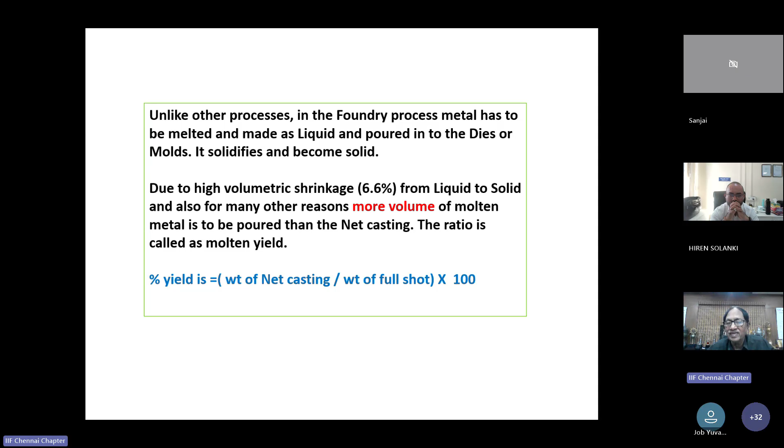Percentage yield is calculated by a formula: weight of the net casting divided by the weight of the full shot, into 100, expressed as a percentage. Now let me show how the various processes give yield.

In sand casting, the yield is very low, hardly 20 to 30%. We have to pour much more metal. In gravity casting, 40 to 55%. Suppose you want to make a casting of 1 kg, you have to pour about 2 kgs of metal. Tilting gravity casting gives 55 to 60% yield. High pressure gives 55 to 65%. Low pressure gives 90 to 95% - the best process. If you want to make a casting of 1 kilo, it is sufficient to pour about 1 to 1.05 kg. Such a very good process.

Counter pressure die casting is also excellent. Used for thin walls and also big castings, 95 to 98%. Excellent yield, but it requires a lot of investment. Squeeze casting is also 80 to 85%. Used mainly for very thick castings where you don't want blowholes or shrinkages.

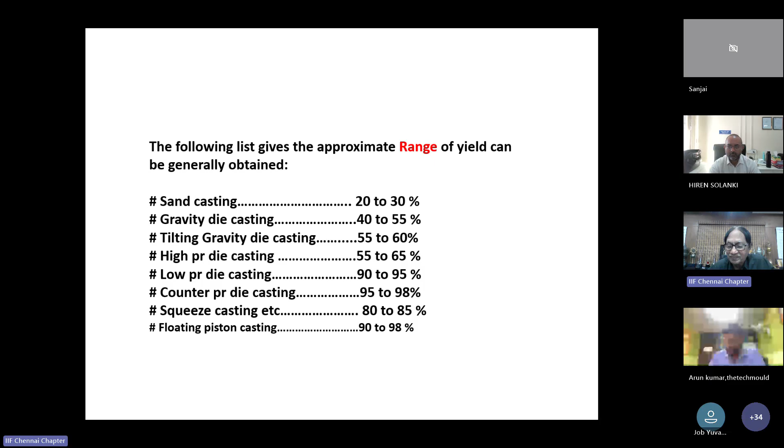All are squeezed out. Floating piston casting is about 90 to 98%. Number one, this is being followed by Hyundai foundries. An excellent process, a variation of low pressure die casting. So, of all the processes, the best one is low pressure die casting.

Some general guidance for reducing the riser and runner. A casting has got two portions. One is the riser, one is the casting. The riser cannot be sold, the riser is a waste, but it is required for the process. Only the casting portion will people buy. And there are some general rules so that the risers can be minimized. Pouring from the top of the cavity is the most economical way. The riser size will be minimum.

Side gating is also useful for very tall castings. Bottom gating is the most uneconomical way because of the bottom runner and the top risers. You have to pour, and only cold metal reaches the riser. Never go for bottom gating unless you are warranted to go for it. Make the riser cavity and casting cavity as separate blocks in the die. Supposing you want to modify the riser, that riser cavity alone can be made separate.

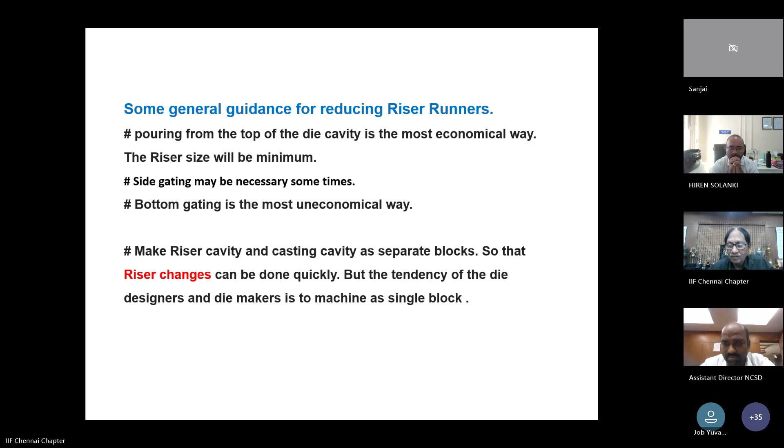But the tendency of die designers and die makers is to machine the die as a whole. That is, the riser cavity, the runner cavity and casting cavity all in one block. It will be very, very troublesome for any changes. Professor Dr. Campbell, the man from the UK, has done a book on casting. He said, in aluminum casting, no riser is required when the section thickness is 6 mm and below. Do not give more risers. More risers, more problems, more fettling. The above may be borne in mind when you make a die design.

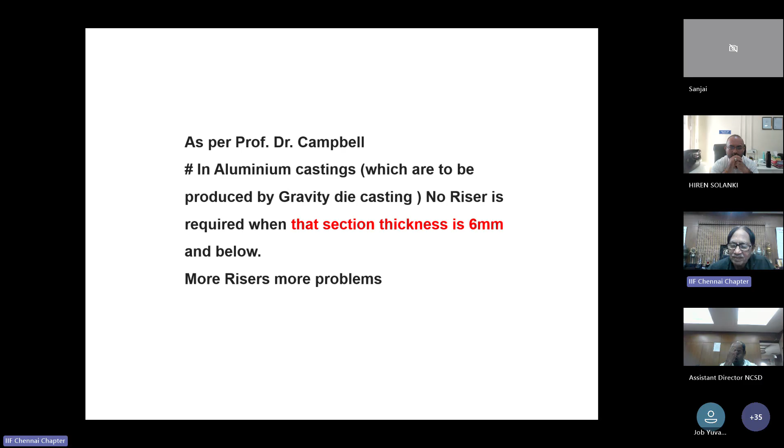Selection of the process for any casting. If the volume and the weight is justifiable, try to go for low pressure die casting where the yield is 90%. It is very economical. Although the initial investment is high and the die design is difficult and complex, yield will be very high. Fettling also will be very easy. Or go for tilting gravity die casting for thinner castings, where the filling will be easier. The riser and the runner are one and the same. You can use the riser itself as the runner.

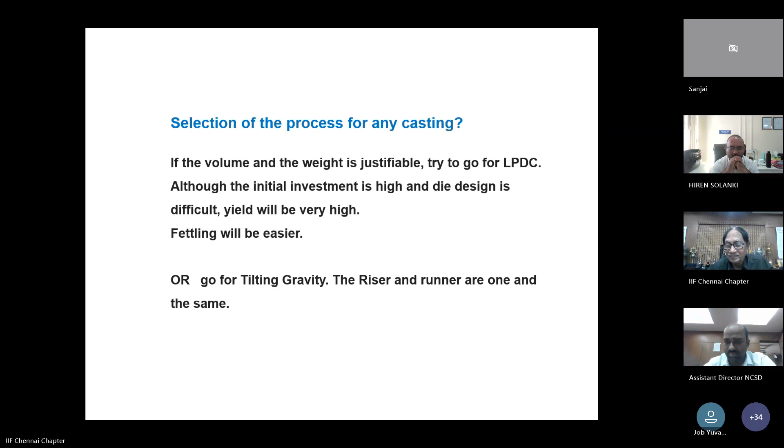The backside of the riser cavity should be made hollow, so that it will be thinner and not get cold very quickly. The die coat thickness on the riser cavity should be at least 3 to 4 mm for retaining the heat. The above will reduce the riser volume.

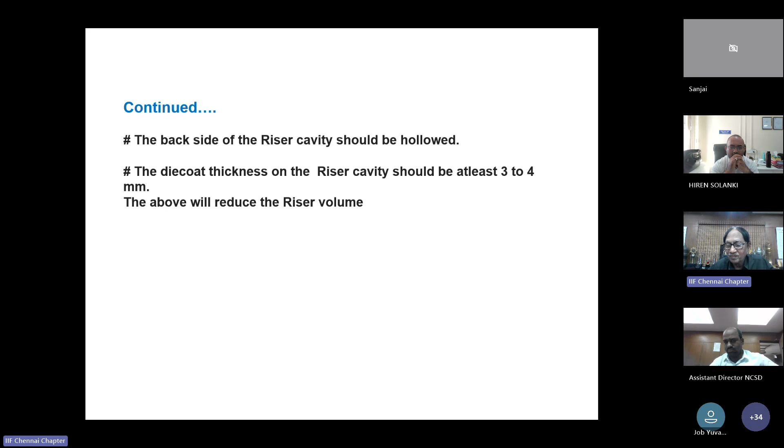In this presentation, I would like to present some real life case studies from the shop floor. These dies I'm going to show had already been made and used for production, but with a very low yield. A lot of effort had been put in to improve them. Some of the dies had been scrapped, and then we made a new die. I hope the case studies will be interesting to you.

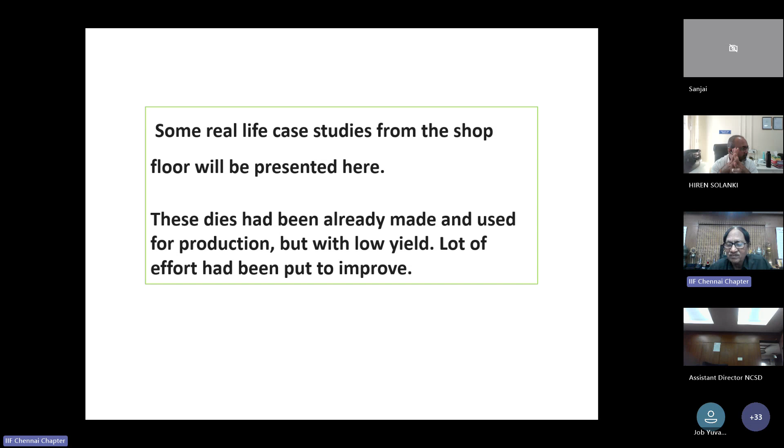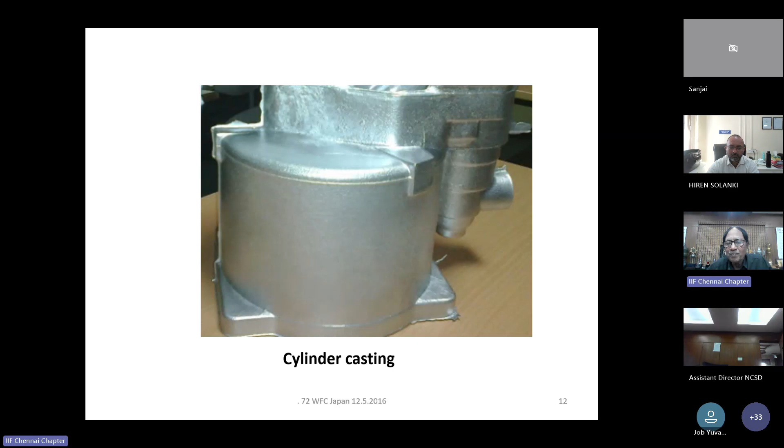This is one casting, a cylinder casting. It weighs about 3.6 kilograms as a fettled casting. Casting information: it is a cylinder. Alloy is LM4, fettled weight is 3.6 kg, shot weight is 7.5 kilograms. The process is static gravity die casting. Die material is En 8 steel and cast iron, but the quality level is very, very critical. The air pressure test is at 12 bar. Finish requirements are also very high. Very critical casting.

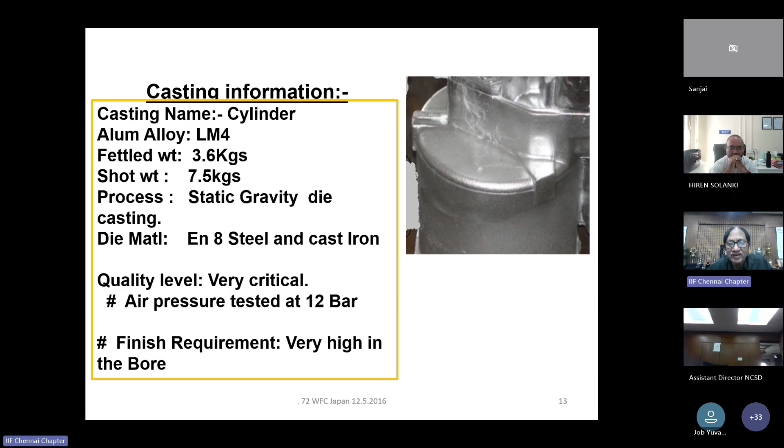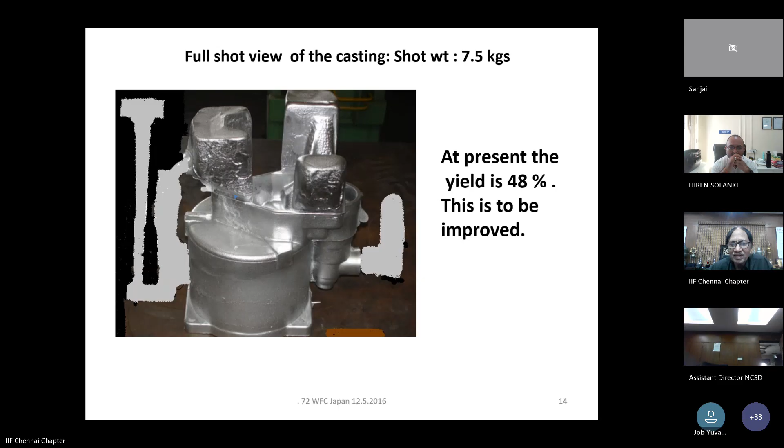See, the fettled weight is 3.6, but shot weight is 7.5 kg, which is very high. At present, the yield is only 48%. This is to be improved as per the management's instructions. This is a running die. These are the various parts of it. There are 3 top risers: 1, 2, 3. This is the side bulb riser to feed this part.

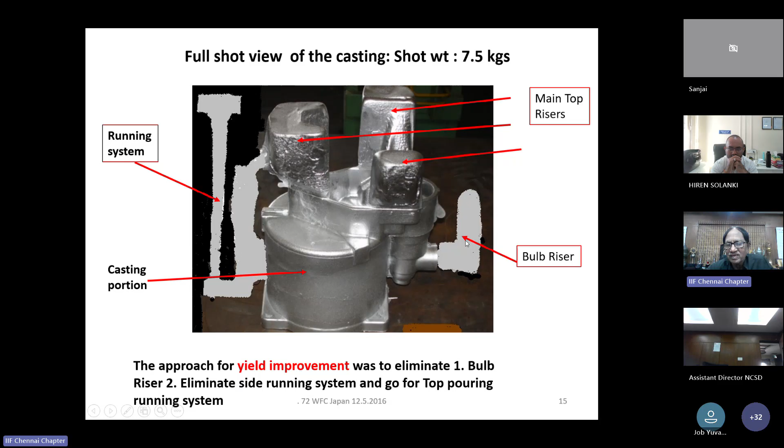This is the casting portion, and this is a side gating. Metal comes over here, descends here and enters in this one. Once it's filled up to here, it also fills the top risers. This is the full shot of the casting. All these are necessary to make a casting. But how to make it better? How to reduce the metal?

So the first thing is we wanted to eliminate these bulb risers. So whenever you do any changes to the casting, please have the machined sample along with you. We did that one and we found that the material can be reduced in this 36 boss, and we found in this one M24 tapping is done. So the material can be removed, the material can be reduced, this feeder can be eliminated.

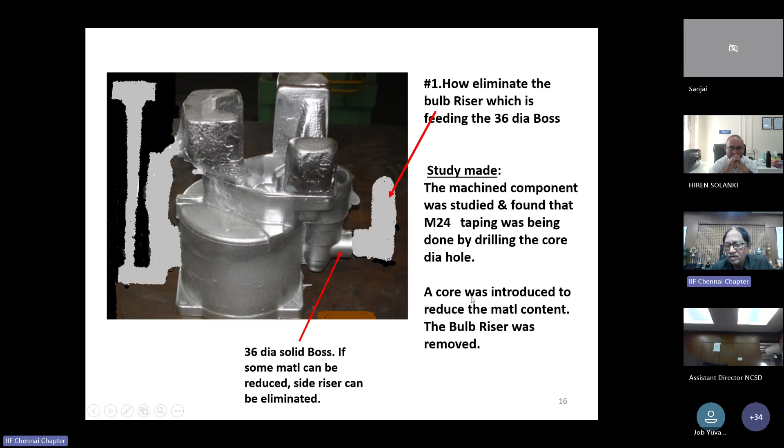See, one of the fundamental approaches for shrinkage is, number one, explore the possibility of reducing the wall thickness or the casting material if the design permits. This is the first step to be followed for solving any shrinkage problems. Luckily, we have this 36 dia being tapped to M24. So a core was introduced in the die newly, a 16 dia core. So nearly so much length and material has been removed in this one.

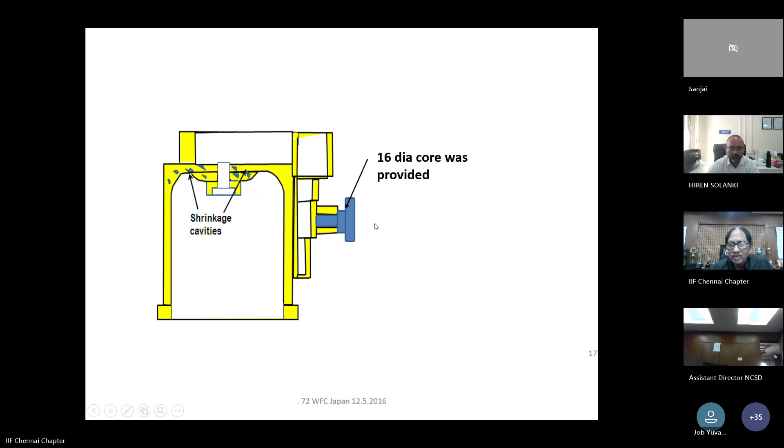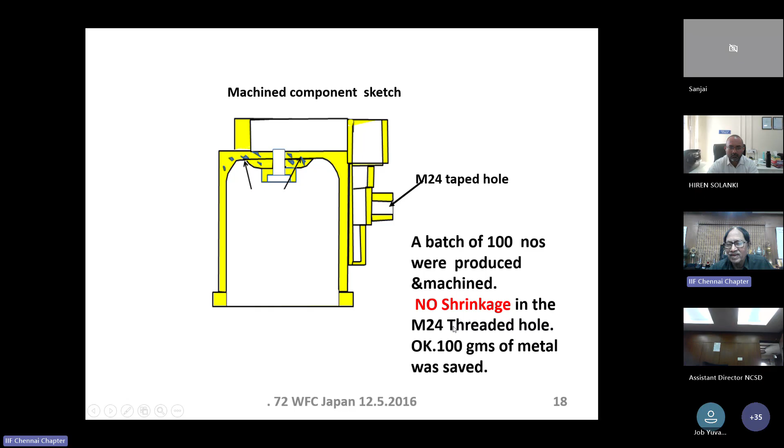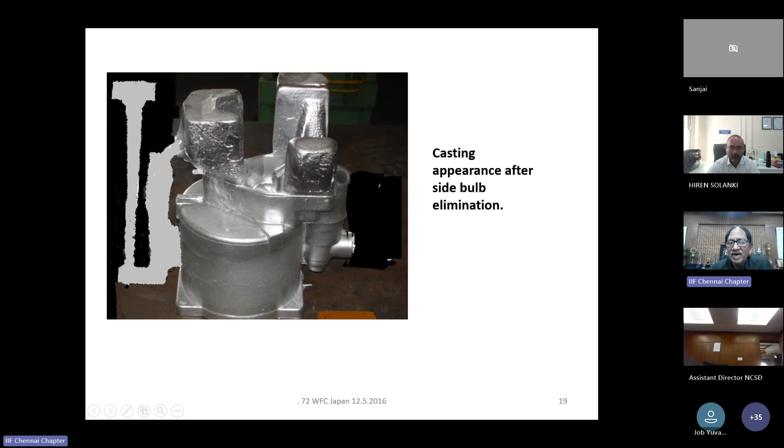Second, removal of the side gating, providing a top gating with a controlled flow. This is a very difficult task. How are you going to remove a metal which is running through this one and coming through? You are touching the very critical portion of this one. Then how to fill the casting? We tried to go for a top riser.

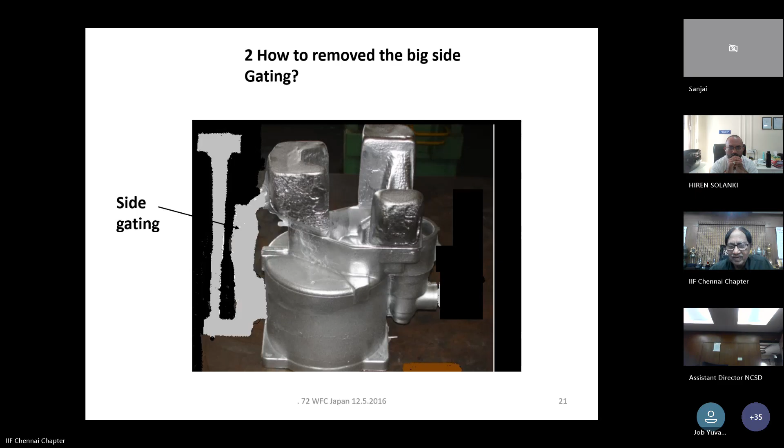If you can succeed by eliminating this one and provide the top gating, it is very economical. I said in the starting, always pour metal from the top. Always hot metal will be there in the riser. With a lot of discussions, pluses and minuses, we decided to try this in the second die. Yeah, this is the shape. We have eliminated all the bulb risers.

This is the runner. The cross-sectional area for this one is 1:4:2 area cross-section. Metal comes over here, depressurizes, and follows. Its height will be nearly 150 mm, and metal falls on the top core and flows down. So hot metal is always there in the riser. If we can achieve this one, or something like that, it will be very good. But it is not easy.

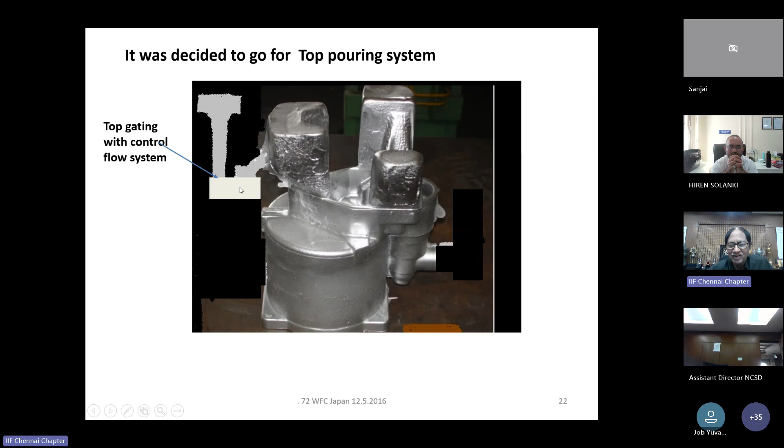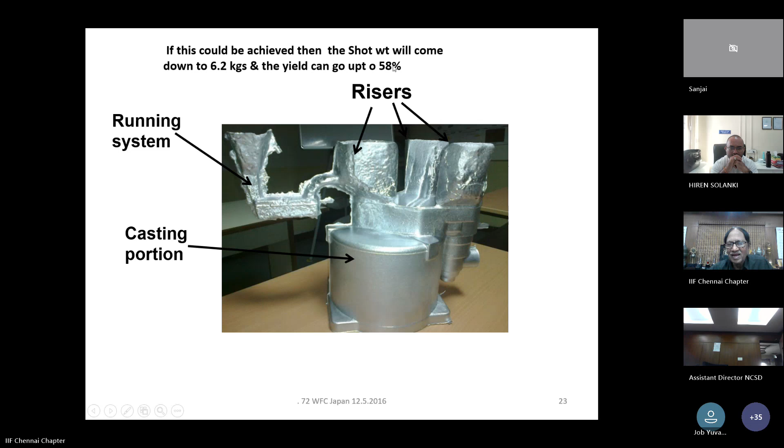This is the running system we proposed. These are risers. So the die was extensively modified and the yield went up to 58%. But I'm going to give the flashback how it was achieved. It's a mind-boggling story. It was not that simple and easy to achieve this improvement. Eliminating the side gating and going for top gating is over. A series of mind-boggling stories will come. We shall go through one by one.

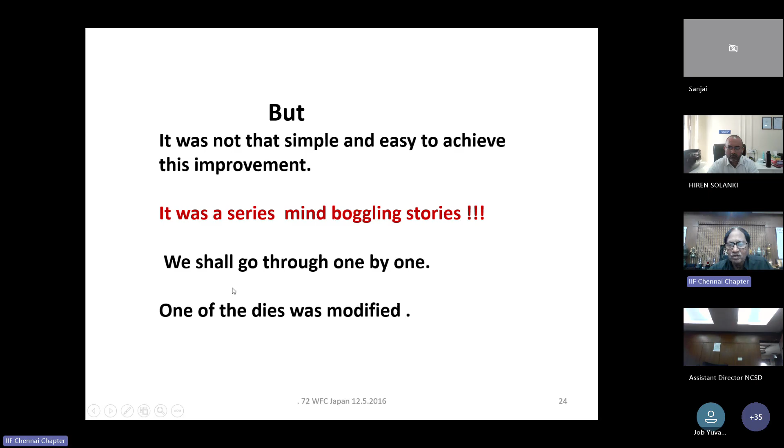The first problem faced in the top gating was shrinkage at the bottom in these areas, and also some corner areas. See the shrinkage areas with the bars inside. This is a problem which makes the casting rejected. It needs to be solved. Why is shrinkage occurring? Insufficient feeding and lesser riser volume. Necking of the riser is also causing insufficient feeding.

Let us see whether it is here or not. Overheating of the big bottom core also makes the metal remain hotter for a long time and gives rise to shrinkage areas. Too many inclusions in the molten alloy can also cause shrinkage. I'm giving you the general reasons. High section thickness also means shrinkage areas. Knife edges in the die can also cause local shrinkage. All the above are the general causes for shrinkage voids.

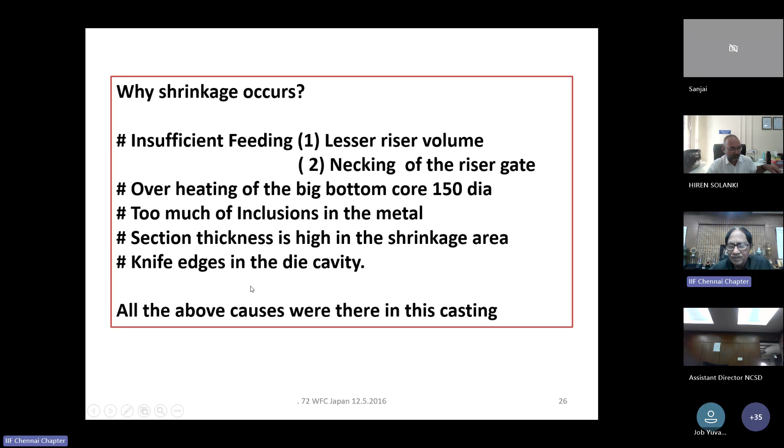We made a kind of why-why analysis, the Japanese method. Shrinkage in the center boss area, and the problem was leakage in the pressure test. Why? Insufficient feeding. Why insufficient feeding? All the three main risers are away from the boss. This is the leak area, but all the risers are isolated. And also, the feeding is not coming from the main risers because this section is hardly 4 mm.

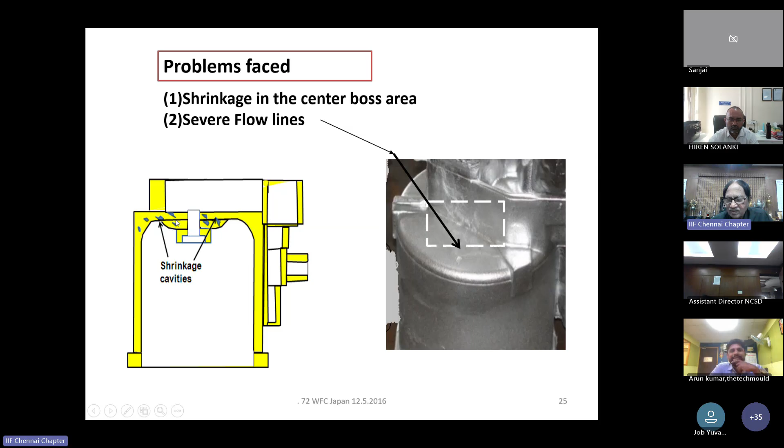This is 50 mm. This is 115 mm. So this solidifies first and makes a neck. So the risers are not effective. There is no feeding at all to this one. So whenever you make a design, see that there is no necking of the risers. This is the main reason. We tried to ask the customer whether we can reduce the thickness there. The customer was kind enough to reduce it to some extent, which I will explain.

Then the second cause is overheating of the bottom core. Why? The metal which is at 720 degrees is fully falling on the top of this portion and getting overheated, unlike the side gating.

The whole metal is showering on the big bottom core. It encourages the formation of shrinkages. How to make it? Try to cool.

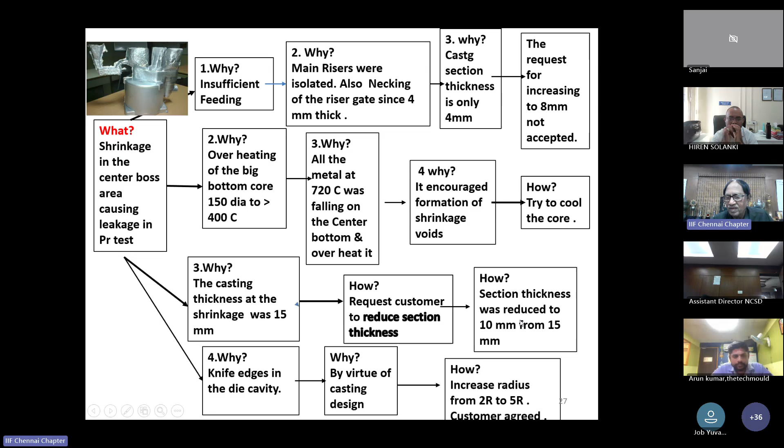Then the third why: the casting thickness of the shrinkage area was 15 mm. It is also very high unnecessarily. We made a request to the customer and tried to make it 10 mm. They agreed to it. Knife edges. In these corners, maybe knife edges.

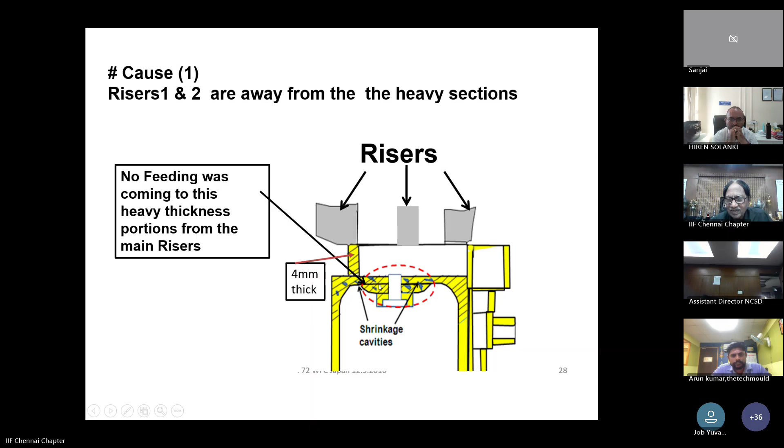This section is only 4 mm. So how can the feed come over here? So it solidifies first and this has got no use. The thickness is only 4 mm. Here 15 mm thickness was there. Plus we made it 10 mm.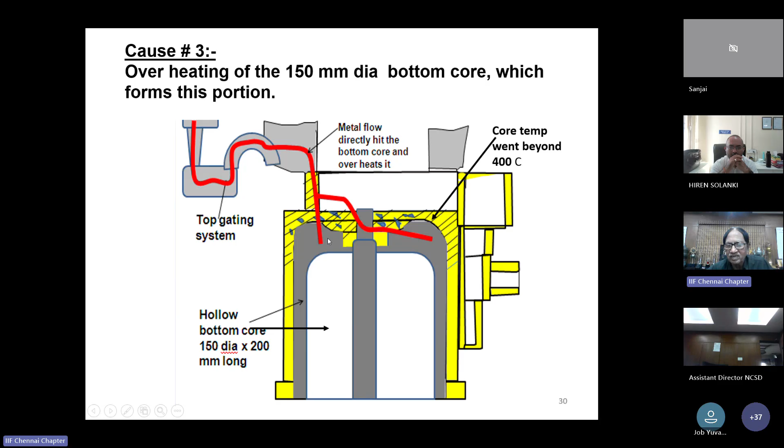It's louder. I don't get you. No, some disturbance was there. Now it's okay, sir. We can go ahead.

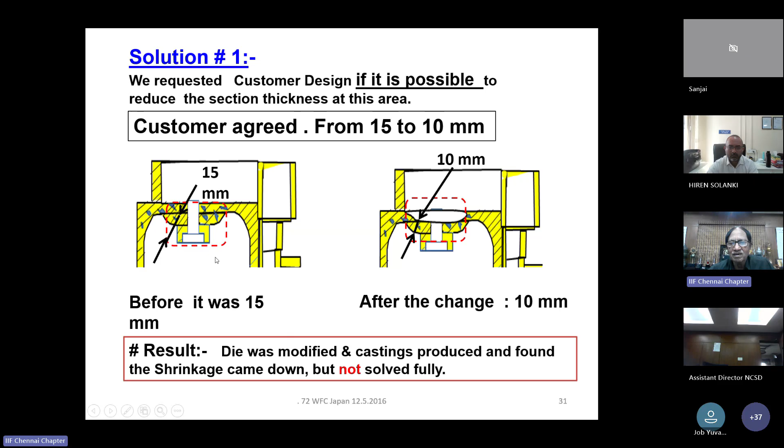Then how to cool that? We want to try to cool it. First step is from 15 to 10 mm. Some shrinkage has come down, but not all. It's not acceptable. So then we try to cool it by putting copper pins like this all over.

We drilled and made all the pins with a lot of difficulties, and blew compressed air for cooling this, so that the core temperature has come down from 400 to around 250 to 260. Then we poured some castings and found no shrinkages, no leakages, no problem at all. But the problem is different. The side effects are very bad.

That's what the Japanese say: whenever you find a solution and find the right thing, also look at the side effects; the side effects may be good or bad. Here, the side effect was very bad. We are sending compressed air, and that air leaked through the copper pins. That's the pity of it.

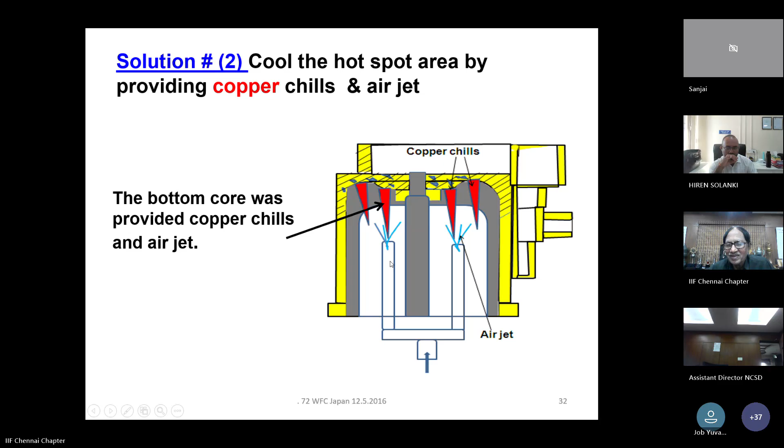See, once you pour for some time, this is steel, I mean, the cassette. This is copper. There is a difference in expansion, and this causes a gap after a month. And the air started leaking through the pins and causing problems. So we can't have a copper plug. So we have to find some other solution. Although the castings are okay, we can't work with these operating problems.

One more operating problem: it was very noisy because you are using minimum 6 mm diameter seamless steel pipes and putting a very high quantity of compressed air. The whole shop was very noisy. Nobody likes it. Also, compressed air contains a lot of water and oil, it flows on the shop floor, and makes housekeeping very difficult. Workers did not like it at all.

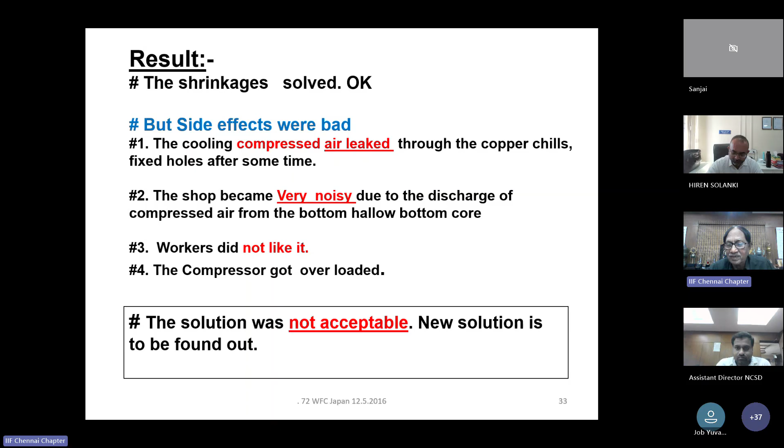Also, the compressor got overloaded because of the constant application of air. Really, the cycle time is 5 minutes. For about 3 minutes, we have to apply compressed air. The solution given was not acceptable, although the casting quality was okay. So we have to find a new solution. A new method of cooling is to be found out.

How to do it? The existing diameter is about 150. Inside, about 120 mm diameter is totally hollow. It contains air. Air is a bad conductor of heat, and we want to improve the conduction. So why not try a solid core? There are no casting changes, but we are going to change the core. Instead of having a hollow portion, we want to go for a solid core. This is for the center core.

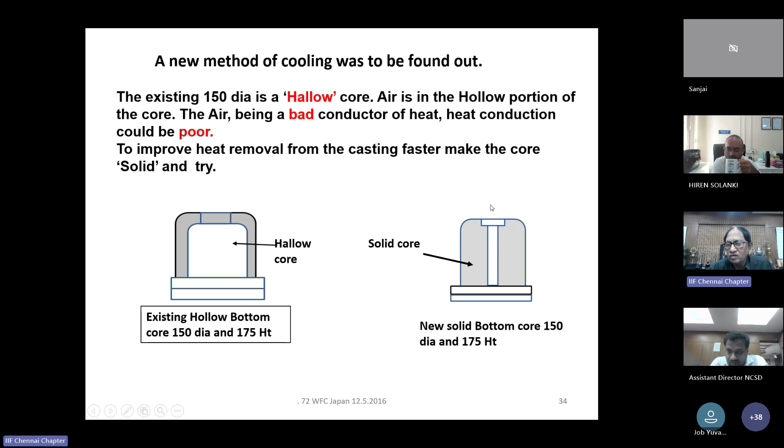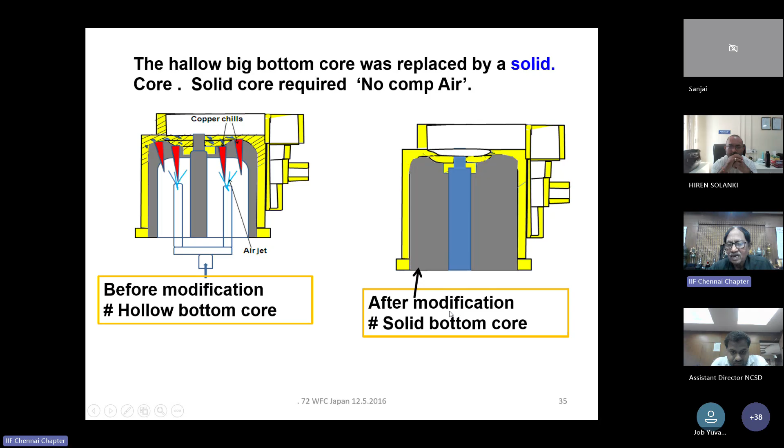This is the old one. This is the newly designed solid core with the center core. This is the new design: there is no air cooling, no copper chills, and the solid bottom. The new core we made.

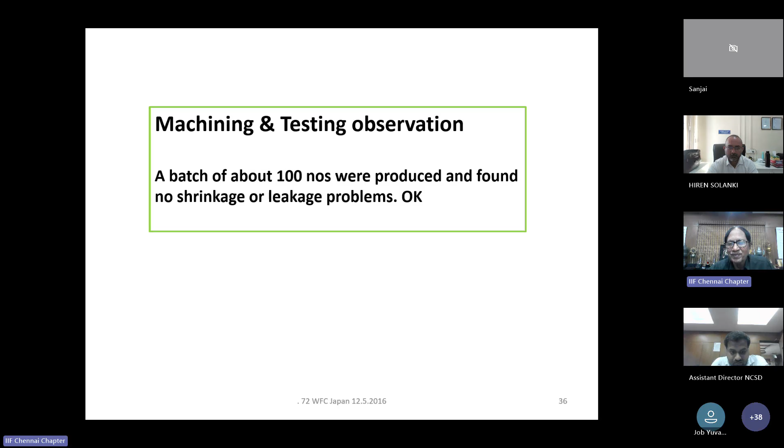And we poured about 100 batch quantity and many more and found there is no shrinkage problem at all. Totally okay. Everybody is happy, there's no air, no noise, no steam problems. Then the subsequent batches were also okay. The problem was solved. This is the final shape of this one.

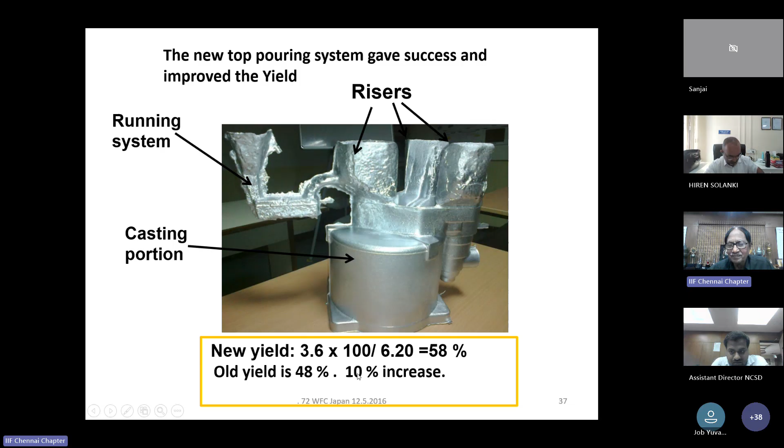Yield is 58%. There is an increase. It was 48% earlier. 10% was the increase in yield. The saving is enormous. 1.3 kg of metal, you don't have to pour at all.

Monthly volume is 10,000 numbers, about 13 tons of castings, 13 tons of metal you don't have to buy at all. That's a very huge saving. At that time, it was about 40,000-45,000 rupees per ton. You don't have to invest that money.

No bandsawing is required. In the earlier one, the side risers had to be cut by sawing and then filed and finished. That work is not there. And also, the top 3 risers were cut by one single cut by a rotary saw. One cutting, there is no bandsawing at all. Pour and cut and send it.

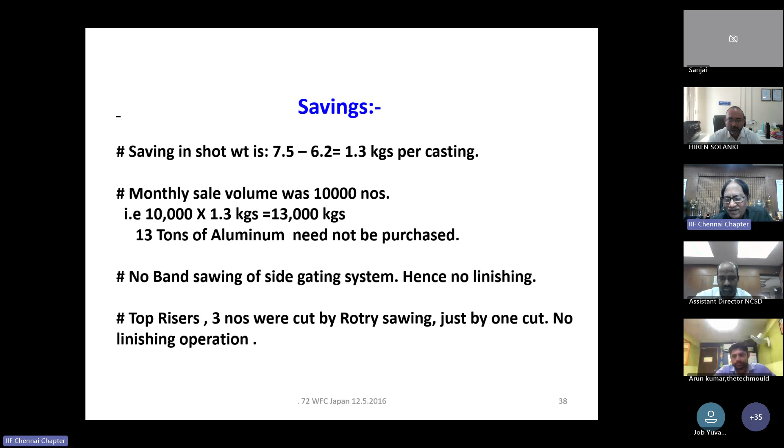So there was a lot of saving. Anything cut by rotary sawing does not require finishing or grinding operations to make it even. So the casting, pouring, and one cut just by rotary saw, everything is ready for filing and dispatch. That is the saving. But the story doesn't end there.

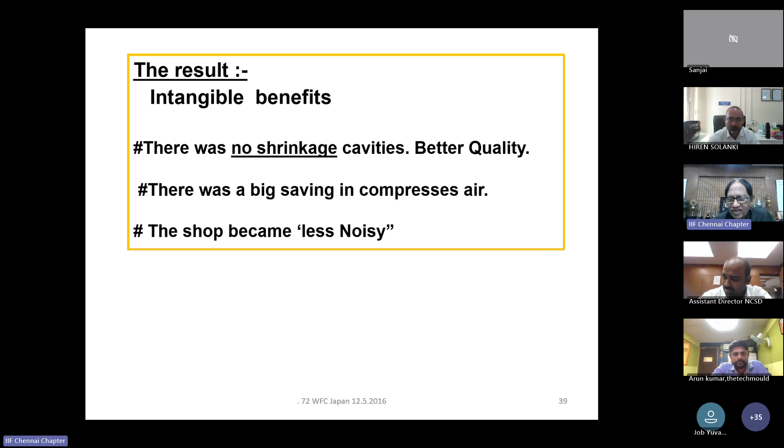Lots of intangible benefits were there: no shrinkage cavities, no need for the compressed air. But there is always a problem. The die did not run well in operation. Why? Frequent stoppages due to the jamming of the big bottom core, because molten metal enters into the core.

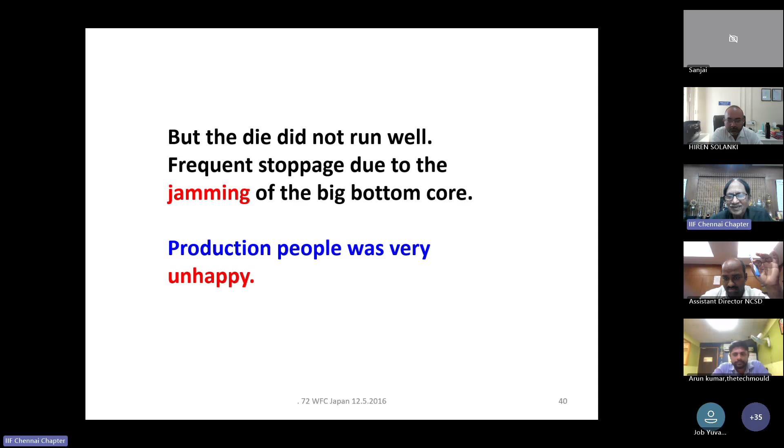The big problem. Production people were very unhappy. The solution was not accepted for patent because of the operating problem, obviously, which is how the metal enters.

See, the metal is poured from the top onto the solid core, the metal comes down. This diameter is about 150, this diameter is only 152 or 153, and this is a core guide, a die base, and the metal comes straight here because the pouring height is very high. 150 plus riser 170, and 1.5 kilograms of metal is flowing through this one.

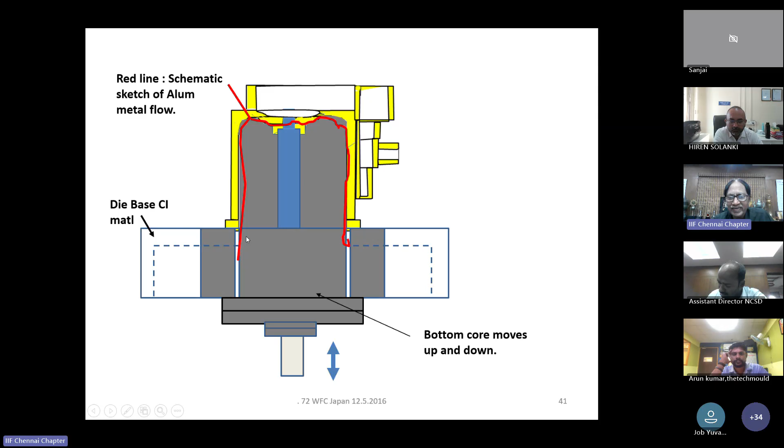It gains a velocity of nearly 2 meters per second. And suddenly there is a gap of 0.4, the metal goes inside. So how to solve this problem? Because once in about 2-3 hours, every time, you can't dismantle the core and then remove the aluminium there.

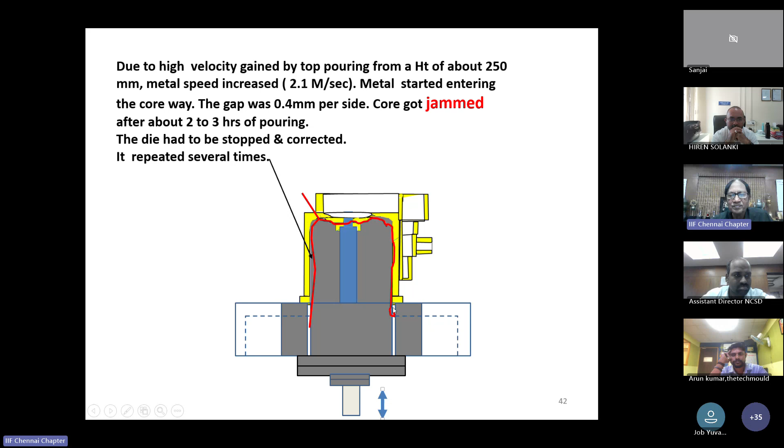The metal speed was calculated by the formula root of 2gh, with 0.25 by gravity, 2.1 meters per second. So the gap is 0.4 per side. This gap, only 0.4 is required. And we thought, why not make it a little less so that metal won't go. Again, we followed a method of why-why analysis for the bottom core change.

It's our practice. Metal enters into the core gap. The phenomenon. Why? The gap between the bore and core shank was 0.4. If the gap is within 0.2, 0.1, metal doesn't enter. If it is 0.4, it enters. And we tried to reduce the gap to 0.2 mm per side in the new core.

But when we tried this, because of the heat of that core, the shank expands and the bottom core jams because of the expansion of the shank of the core. So 0.2 is too tight. So 0.4 is a must. It is fixed now. We cannot go to lower gaps.

If we do it, no metal enters. The core works with molybdenum. We put some molybdenum sulfide on the shank for lubrication. It works for half a day or 1 day. The next day it changes. Molybdenum sulfide was put on the shank and it was working with the 0.2.

But you can't dismantle a big die every day and then do it. So it amounts to saying the minimum of 0.4 is a must between the guide and the core shank. We can't skip that one. And how to make it?

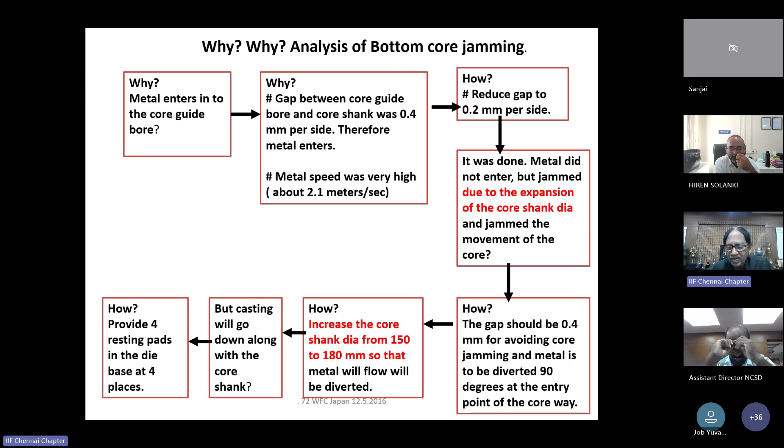The core diameter was increased to 180 mm, the shank portion alone. This is the shank portion, the old one. This is the new one, 180 the shank diameter. This is 150 diameter. The metal comes there and comes straight with a 2 meters per second speed and straight away finds a gap of 0.4 and goes in it.

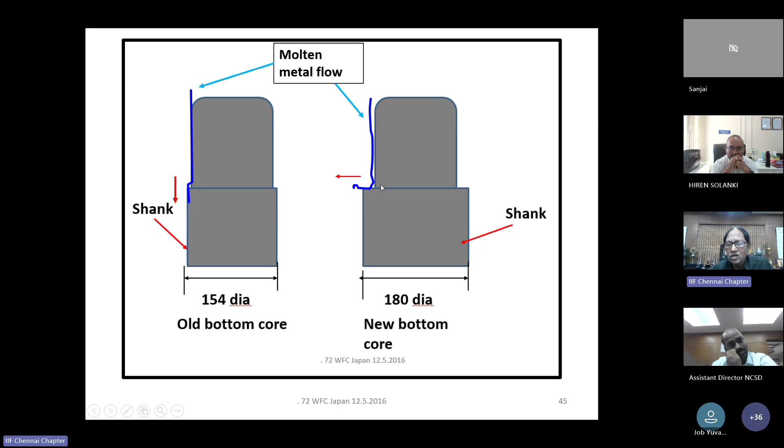In this bigger core with this bigger shank, the metal comes down straight away and then it finds no, the parting line is away. So if there is a 90-degree turn given, the metal goes here and fills the gaps. In this one, there is no metal entry at all in this core way. With the 0.4 gap, the die was working very well. This is the core way.

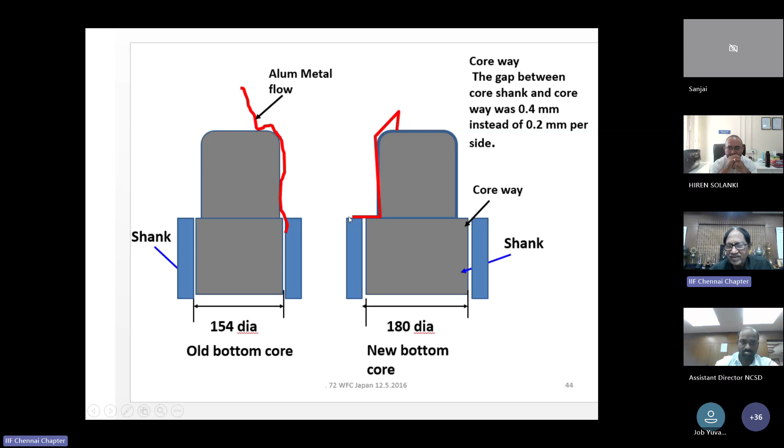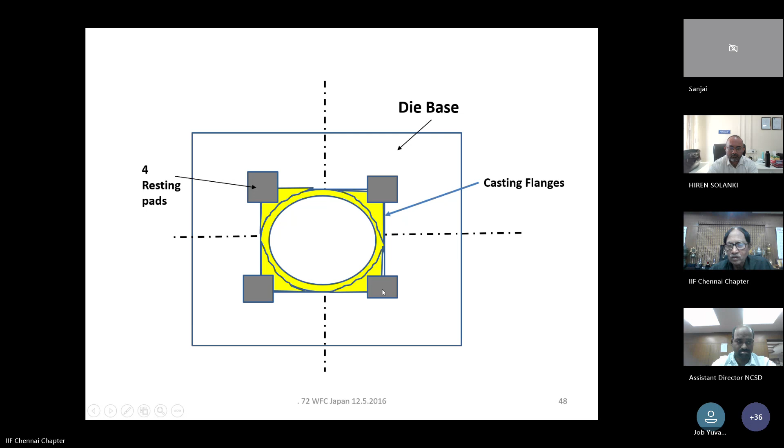This is the core guidance, and metal enters. Here, the metal is deflected because here there is a very small one. There is 20 mm there. It comes here, hits it, lets the speed go down, and this was very successful. So we were able to operate with 0.4. To keep the casting on the die, we put 4 pads like this, so that the casting stays on the die base so that we can remove it.

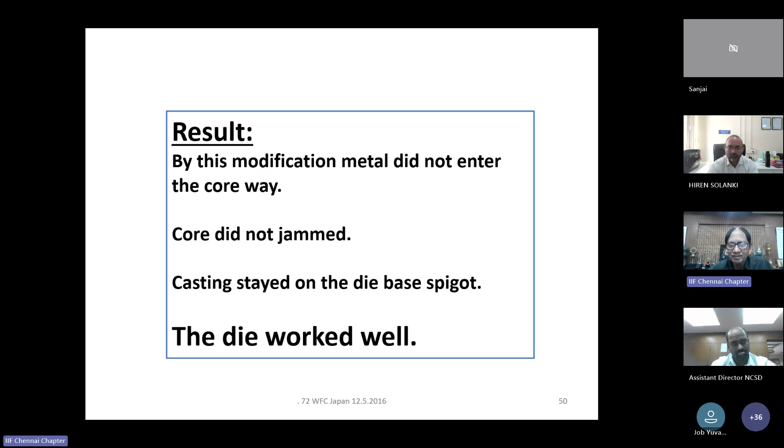By this modification, metal did not enter and the core did not jam. With the casting on the die base, the die worked very well. This was a grand success. This is the end of this case.

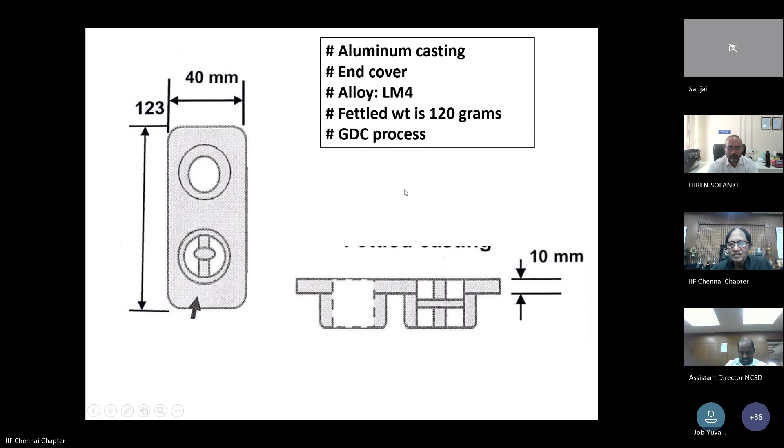Coming to the second. This is the end cover, a very small casting, but it has so many problems. This is one small aluminum casting, alloy LM4. Very small casting, 123 by 40 by 10 mm with 2 bars. But the casting yield is low. This is a small casting and a very big riser on this rectangular portion. Yield is hardly about 30%. Shot weight was 360 grams.

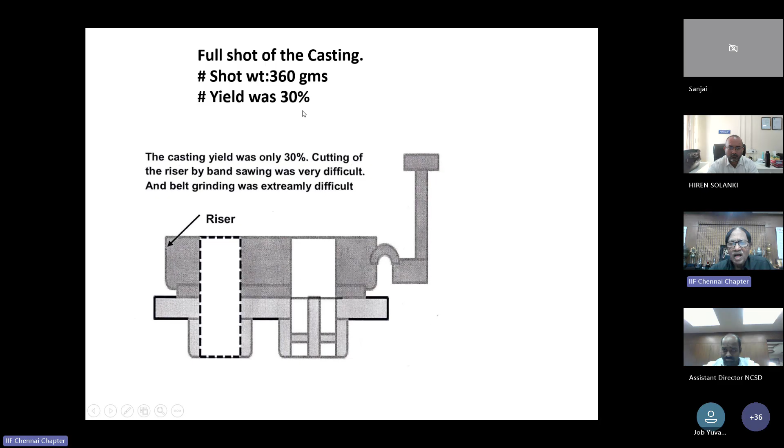Not only the yield problem, the operating problem was very heavy. It was hell to operate. Fettling also will be very difficult because this is 25 mm thickness all over the area, and the casting is hardly 10 mm. Holding it by hand and then sawing it by bandsaw is very difficult. It has also got 2 top cores. Very difficult to work. I will show you the die construction.

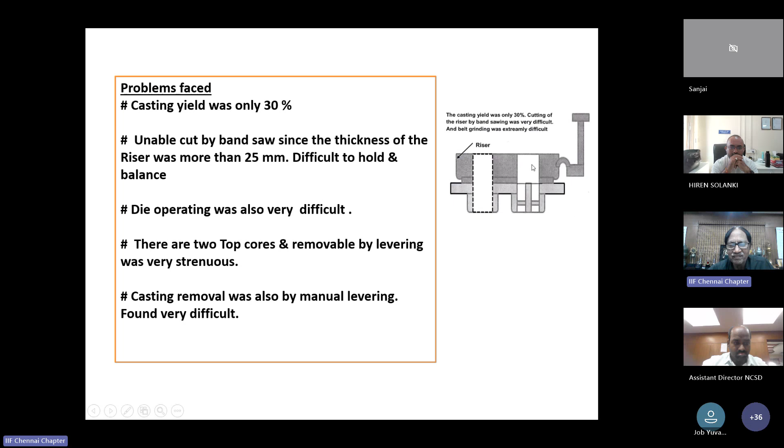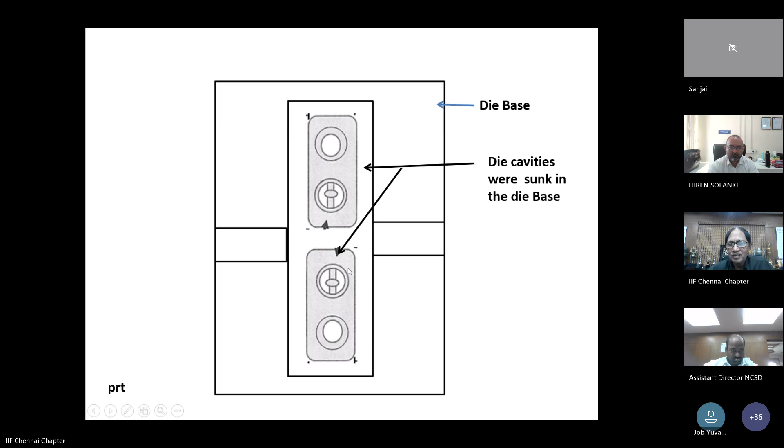This is a 2 impression die. Die base and a die half. This is a die half. These are 2 top cores. These are the 2 cavities sunk in the die. This is the view. This is the top core 1. This is top core 2. All to be levered for removing. The whole cavity is sunk into the die base. And this is the pouring system. We pour in this one casting and also pour in this one.

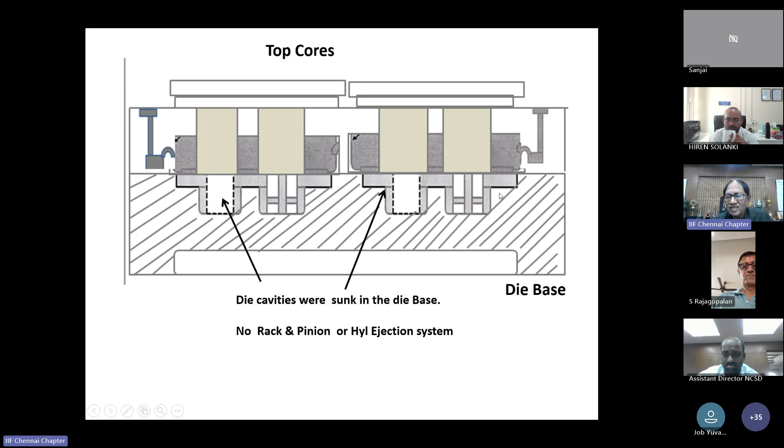The cores have to be levered and removed, each core weighing about 10 kilograms, every time by the operator. And also there is no ejection system, mechanical or hydraulic, nothing was there. Only a solid one. The operator has got to lever the casting and then remove it. A hell of a job. There was no way for modification of the die. So I recommended the die to be scrapped, there was no other way. It was accepted and a new die was made.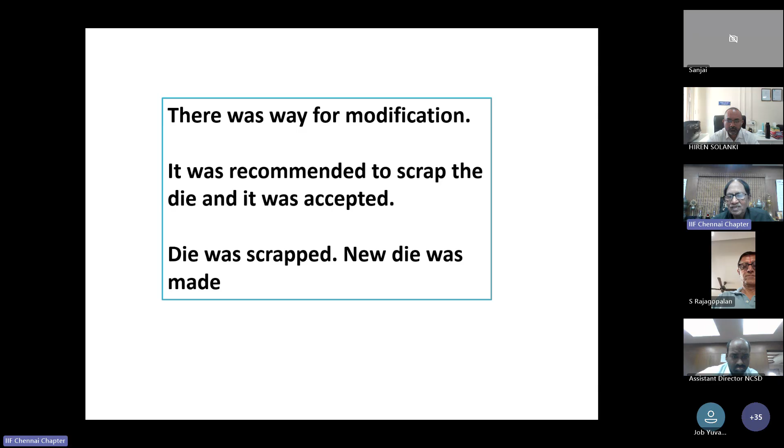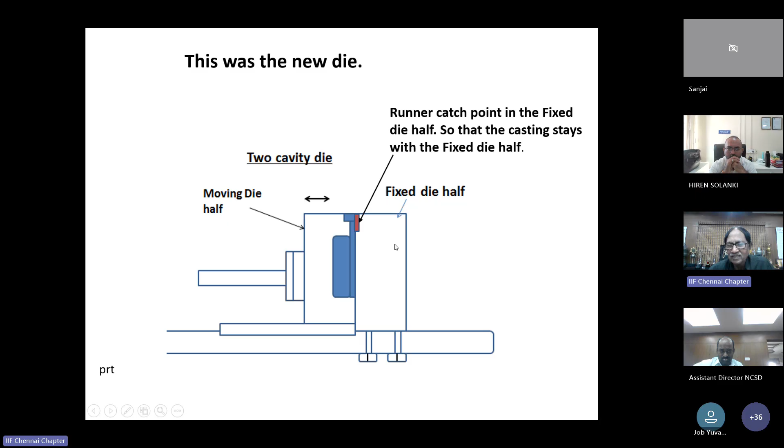This is the new die, a simple die. This is one fixed die, very simple. This is a moving die, operated by a toggle. This is the die base. One is fixed here. And there is also a runner catching point, so the casting will move, go with the fixed die. Very simple construction. This is also a 2 cavity die, pouring from the top.

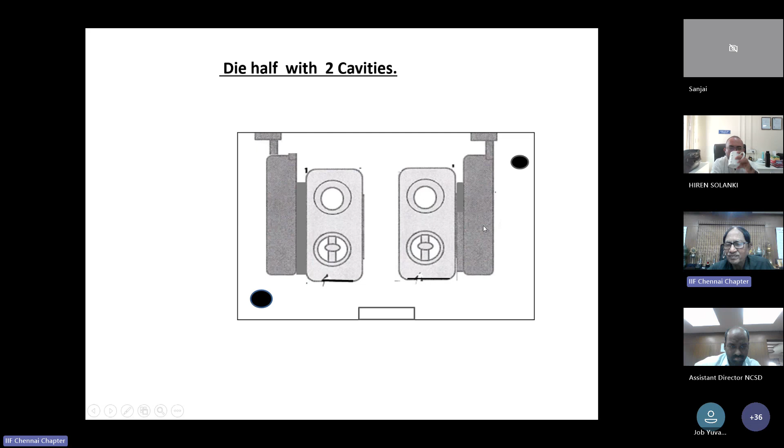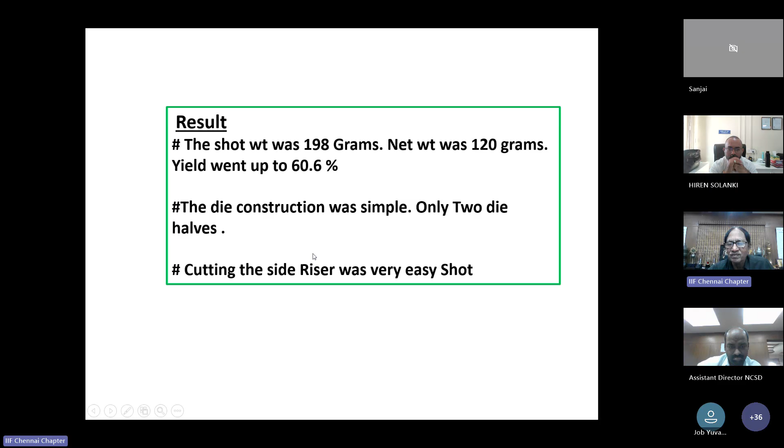A simple thin riser. Because as I said earlier, castings which are very thin need not have feeders as per Chvorinov. So this is the side feeder. If you want, we pour from this. A very simple work. The shot weight was 198 grams as against 300 grams. Net weight is 120 grams. Yield went up to 60.6%. The die construction was simple, only 2 dies. Cutting of the riser was very easy, unlike the other one. The end.

Now let me go for the third case study. Manifold. It's something different. This is a very long, thin casting. The thickness is hardly varying from 5 to 6 mm. Very, very long, this is about a meter long. The back side of it is hollow and formed by sand cores. But the weight is 9.5 kg casting weight.

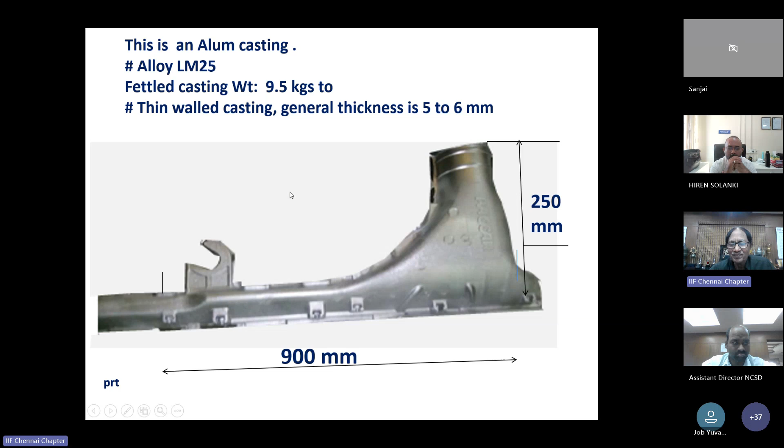Here we pour metal, it comes down, and by the time it goes to the end of 900 mm, all is getting cooled. These risers raise up.

See, the metal comes here and goes down and enters from the bottom and tries to go. The bottom gating, the horrible design. Metal won't go through this one. It will fill up only after going to this one. I don't know how it was designed.

And by the time the metal goes from here to here, you get a lot of sharp rejections of cold shuts and shrinkages.

Two men were pouring the die, and the casting also stuck with the moving die half in which there is no ejection. It was difficult to remove the casting.

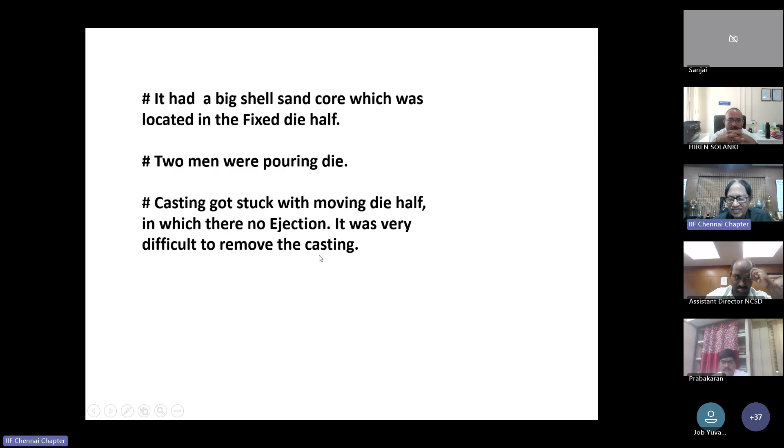See, casting removal, if it is stuck in the moving die half, is a big problem. I will show you the die design.

This is the die, like a PDC die. See, this is the fixed die. With the ejection, the casting is supposed to get stuck here. This is the moving die, it moves. This is a tie bar. Nobody makes tie bars like this for static gravity.

This die half is pulled by a hydraulic cylinder. This is rolling on a beam, all that. And with this knee, you won't be able to touch up the die cavities for coating and all. You see, it looks like a PDC die. Horrible design. Anyway, the die has been made.

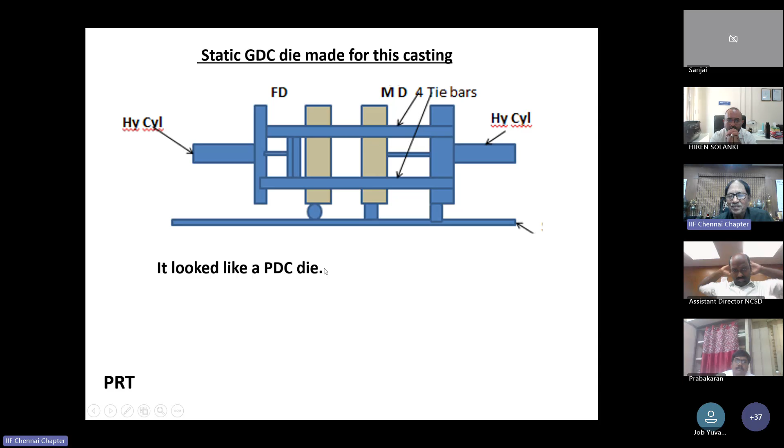Now, I express my view, a strong opinion. This casting cannot be produced by static gravity at all. This casting is not meant for it.

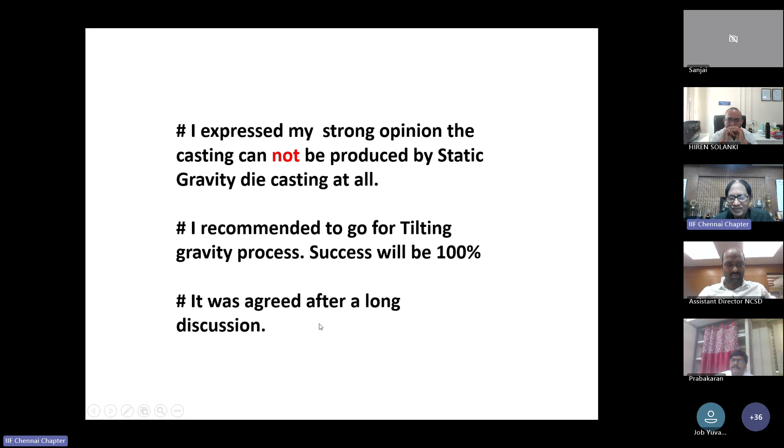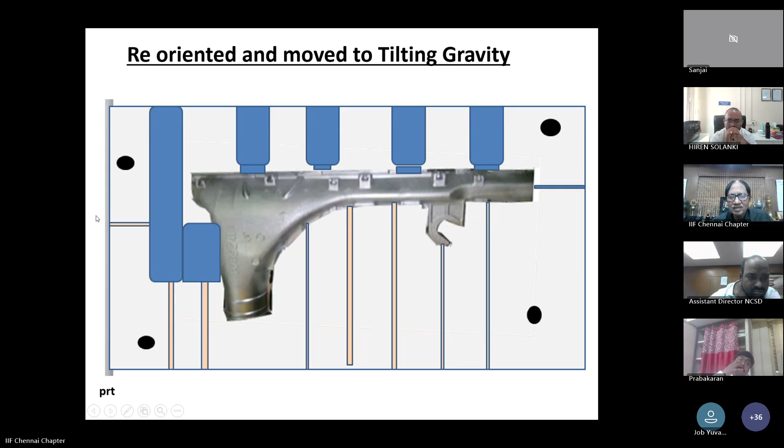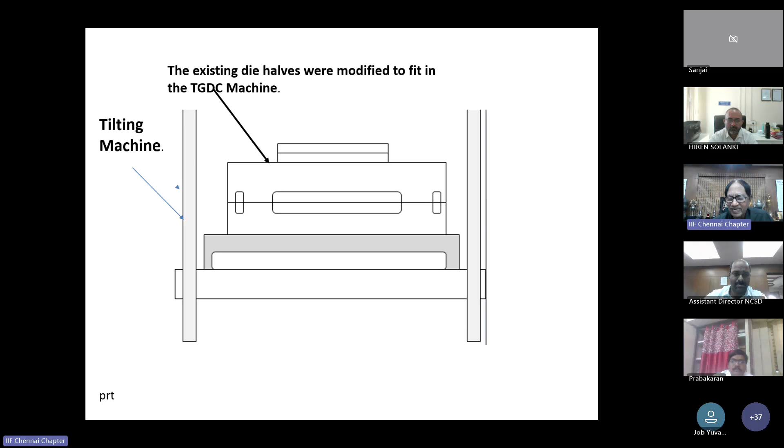This is the die. The same die was modified, all the risers removed, and fitted into the machine, and the whole machine was tilted and poured. It was the first shot success.

And this is the shot. For some reasons, I am not able to give the full details. This is, only 4 or 5 risers, no other riser. And sand core is here.

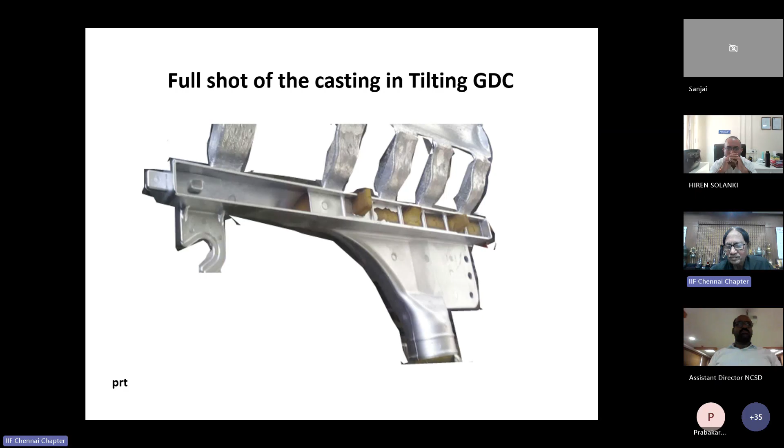This is the end shot. Fettled weight, and that doesn't change. The full shot weight in this is 12.5 only.

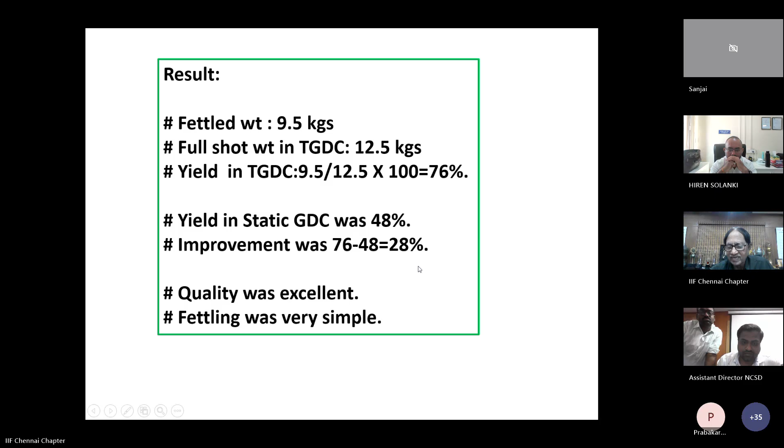Yield with the tilting gravity method is 76%. Previously, yield was 48%. Improvement was 76 minus 48, 28%. Quality was excellent, fettling was easy, and it was a success. End of the time. Any questions you can ask?

Sir, this is Yuvraj, sir. I have one question. See, we have a project for Ola, okay, it is a frame and footrest, right?

So the material is AlSi10Mg, and their requirement is that yield strength should be minimum 210 megapascal MPa with elongation of 4 to 6%. And they want to make this casting with heat treatment if you're not getting the minimum of 210 MPa, sir.

So we are doing it on the pressure die casting method. So if you have any... yeah, they are open to any other alloys also.

At present the process is high pressure casting with a certain structure. Yes sir, high pressure castings cannot be heat treated. You said that you are heat treating it. No, see, I'm not getting the minimum 210, so they are asking for any other process. It can be heat treated, or it's just a suggestion they gave me.

So what is the size of the casting? Size of the casting, one minute sir.